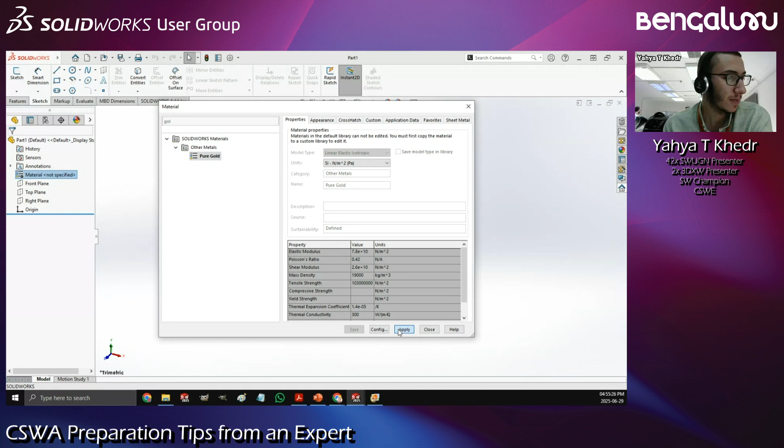So you can go over to materials and specify whatever material the question wants. If it's not in this list, that's fine - you can go to edit material and search for it. Let's say I want gold, for example. Pure gold. I applied it, and that's fine.

So that's cool and everything. I've got the units, I've got the materials. I should be pretty much good to go, except there's one more thing - making sure the exam is actually different from one taker to another. What happens is, let's say I take the exam and Prasad is sitting right next to me, also taking the exact same exam - we're going to get different questions with different numbers and different answers, different everything.

Why? Because there are certain variables that have to be set in the question first, and there's a program or an API in the background changing these different values and variables, and based on that, calculating what the new answers are going to be for me and for Prasad. That's a way to make sure everything is streamlined and easy to create from the exam standpoint, and also to challenge us on another thing - equations.

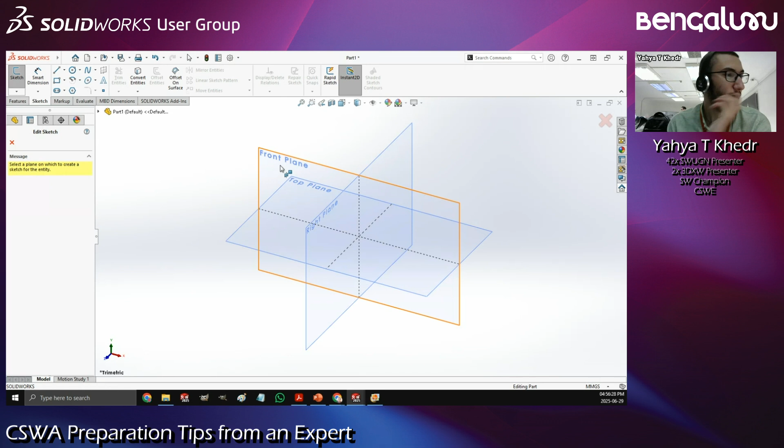Because I can come over here and do a sketch on the front plane - I'm going to be very slow right now because I never go over here to get a rectangle, it's always on my keyboard shortcuts. So anyways, let's say for example I want this to be 100 by 50. Okay, so I'm just going to type in 100 by 50.

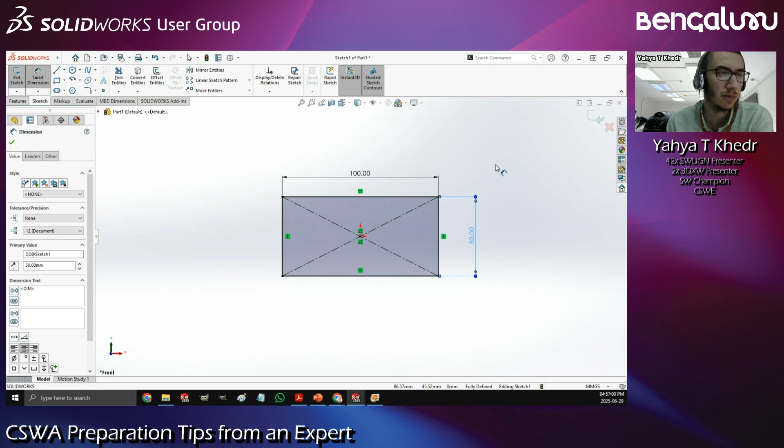That's fine. But if I'm later on going to change it to, let's say, 75 by 25, it might make sense to actually put that as a variable. Maybe, I'm not sure - it's very easy to go back again and change it, right?

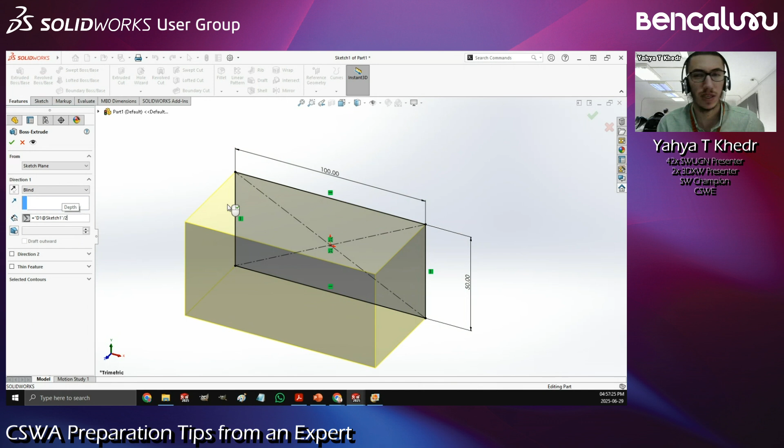So what if I say, okay, let's go and create an extrusion. And this extrusion, I don't want it to be a fixed number - I want it to be linked to this 100 or this 50. I can say equals, doing an equation right now - I want it to be this 100 divided by 2, for example. So it's always going to be this number divided by 2. That's an equation, right? And to make sure you follow me here, if I go over, these are regular dimensions.

If I click on this one, you see this sigma sign - this is the indication of an equation. This tells me that this dimension is actually an equation. And if I change this 100 to 75, this one is also going to update to 37.5, and so on. So right now I'm just using equations, I'm not doing anything with variables yet.

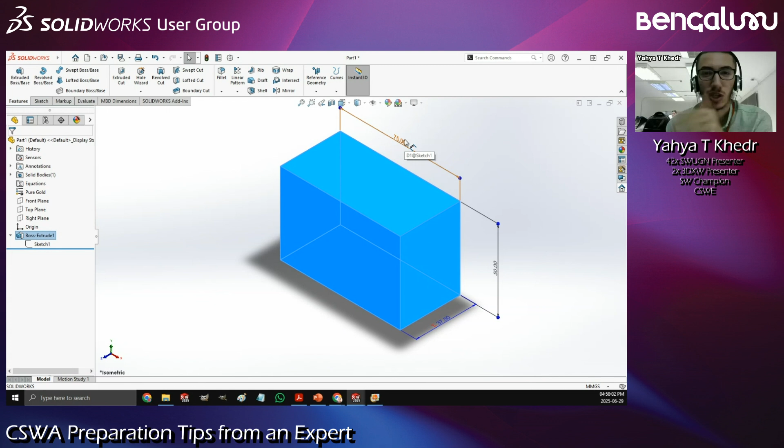But the thing is, what's this 75? How do I reference it later on? If I come over here and say, hey, I want an extrude cut, for example, and I put the circle, and I want the diameter to be the same thing.

What do I type in here? Do I type dimension 1 and sketch number 2, or was it sketch number 1? That's a bit of a hassle, right? That's why the exam actually gives you some equations to use.

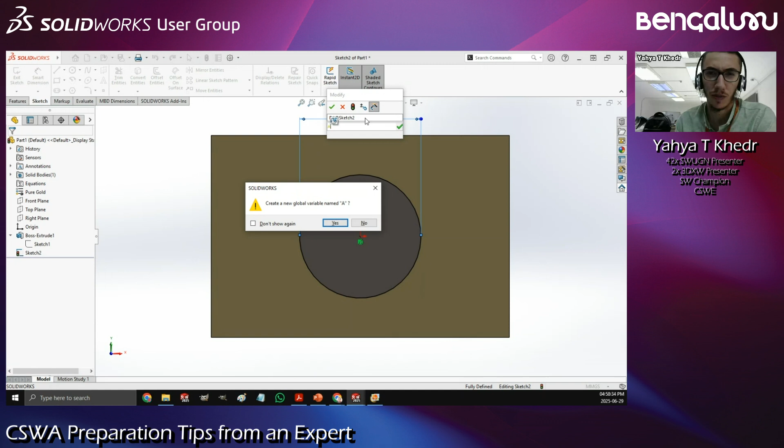Right in here, you can do it right from here. I can say A, and it asks, do you want to create a global variable? I'll say yes. So it's A, and in this case, A is going to be 75. Okay, maybe that's a bit too much, but hey, that's fine.

Anyways, let's go with equals. Once again, look at this drop down menu. I see global variables, and I've got A inside of it. Now I can actually link it to a global variable. In this case, I might do it as A divided by a number, because A right now is 75. Let's keep A at 75.

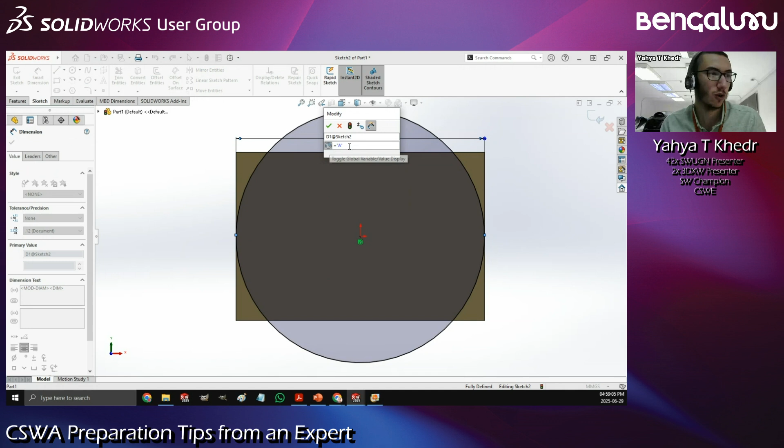Let's go back and get to the equation. I'm just toggling the equation view and the dimension view. Let's go with A divided by 2 as well. Okay, same thing. I'm going to exit the sketch.

So far, it's fine. This is very simple. But remember, what I'm trying to do is maintain design intent. And design intent—it's not my design intent, it's the exam's design intent. So if I go back again over here, this 75 dimension...

You can also come back here and say, I want this to be equal to A. It's also going to be the same value. But the cool thing here is, let me now come to this equations dialog box and right click and manage equations.

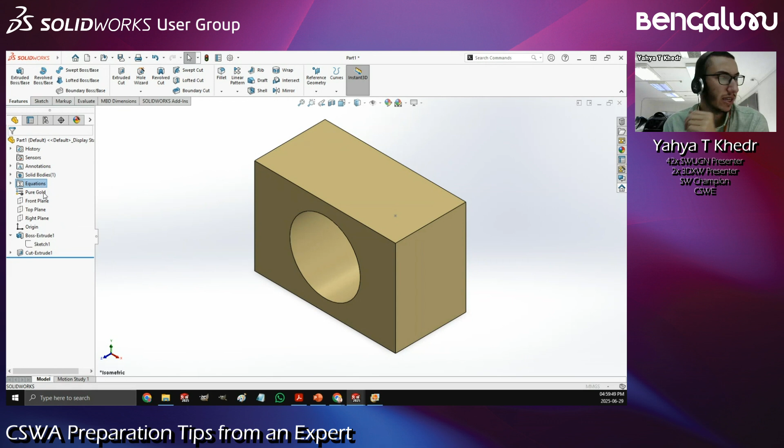I have a view that tells me, okay, you've got this variable, 75. If you want to change it, I only have to change it here, and it's going to populate everywhere else—in this dimension, the sketch for this one and that one. But here, if I want to change it, it's actually referencing dimension 1, sketch 1, which is referencing A.

You see, linking a dimension to a dimension is fine, it will work. But it's not easy to remember which one is the master one that I should change in order for the others to follow. So the easiest thing here to do is to actually change this to also A.

Just like that, all I have to do now is change the global variable and all of these will follow. If I change this A from 75 to 50 and hit rebuild, now look at these values that evaluate.

It didn't change to 50. Let me go once again. Now it's 50—25, 25, 50, right? So it's way easier to have all of these values in the same view over here.

I can also come over here and say I want to create B. B can be like 67.5, because why not? And then C, which can be 2025, and D, which can be 1995, because also, why not? So just like that, I've got a couple of global variables, and since I've already created them beforehand, I can just go ahead and create any sketches or anything.

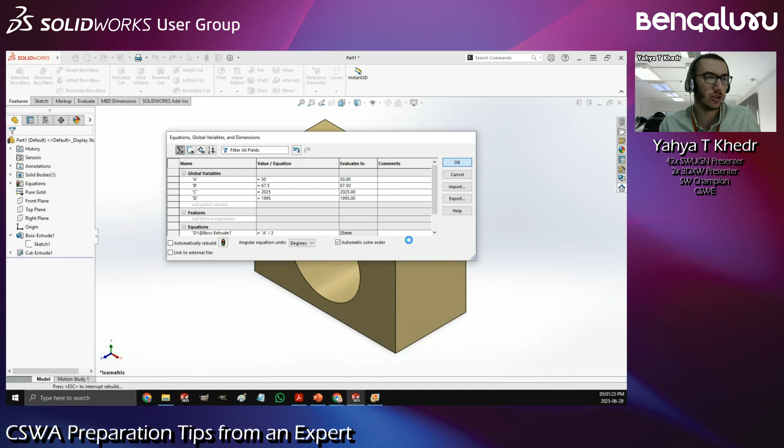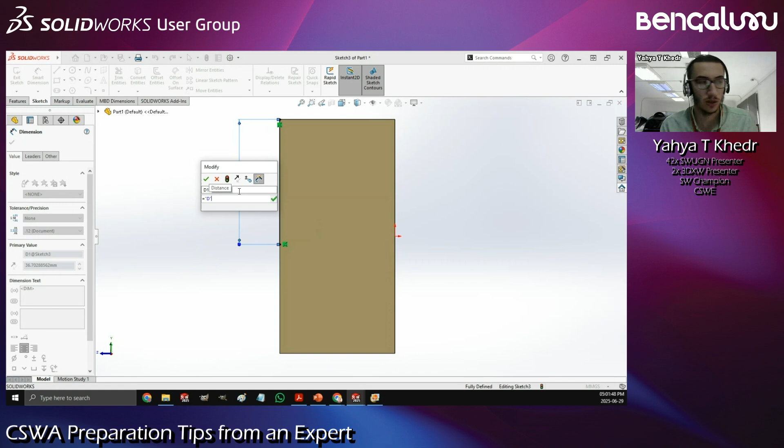Let's do something here, maybe a sketch, and let's say I draw a line like that. If I give that line a dimension, as soon as I hit equals, I have that drop down menu. So I move it, equals global variables, and I've got the whole list to choose from—A, B, C, D, and so on. So I can just choose the number, and there it is.

That's a cool way to link everything together. Once again, to make sure that when you change it later on—when I change A, B, or C—I don't have to remember where I used that 50 dimension. Was it in the extrusion? Was it in this sketch? I don't know, I don't care, because everything is saved by SolidWorks in the equation dialog box. What I have to do is just go and change that value from one place, and it's going to populate everywhere else.

This is the next step that I usually do. I go ahead and make sure that I've got the units set up, the material set up, and then I've also got all the global variables set up so that I can just start using them right away inside of my sketches, or even features.

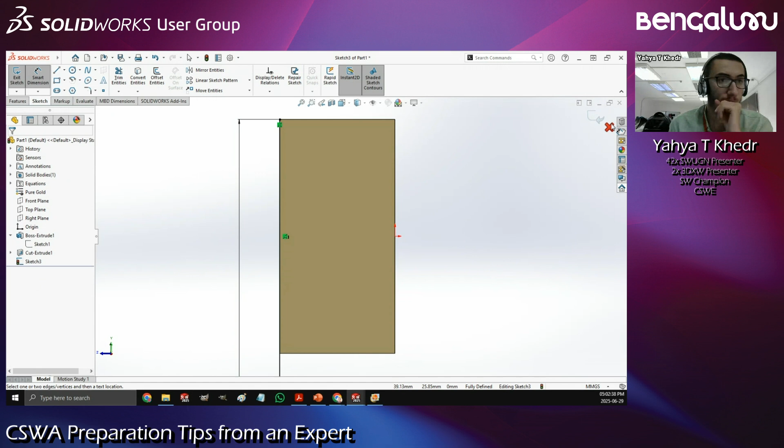Let's exit this one. Now let's talk about the next thing—I've got everything set up correctly. I've got the units, the material, and the global variables. Now what I can do is go ahead and start creating the model, right? That makes sense. But here's one thing: usually we start by sketches. Everything is based on a sketch, and then the sketch is used later on to create a feature.

Not all sketches are alike. This sketch? That's a nice sketch, and this also is a nice sketch. You know what's not a nice sketch? Let me show you what's not a nice sketch.

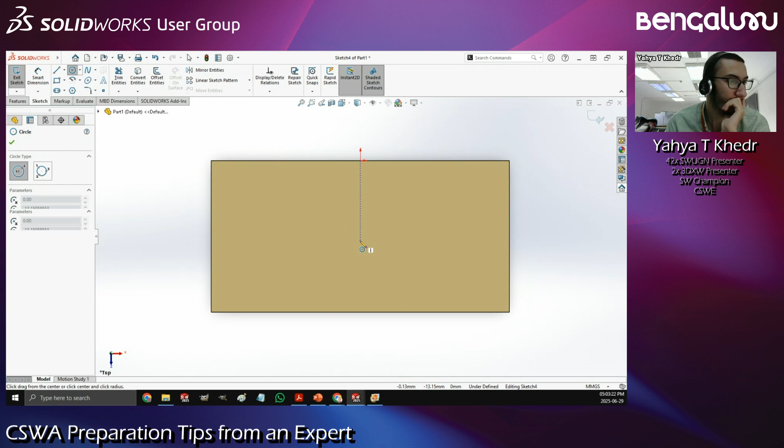I'm going to come over here and do a sketch. Let's say I want a circle to be maybe over here, and I want that circle to be like 15 millimeters. So I'm going to come over here and put a 15 millimeter dimension. Perfect. And I'm going to do an extruded cut.

So just like that, I can do my extruded cut. Let's do it through all, upwards. And cool, right? Everything is cool. Does anyone have anything to say? I created my sketch, and I also created my feature with it, and SolidWorks is not angry with me. The goal is there, but I'm angry with myself.

Why? Because you see, this sketch, when I work with it... someone's saying it in the chat, yeah, it's not fully defined, exactly. So this sketch, when I'm editing it, look at this corner down here in the status bar. It says under defined, and that's not what we want. We want our sketches to be fully defined, and as the tutorial says, fully defined every time.

There's another way to know if your sketch is fully defined or not, which is also from the feature tree over here. See this? That's what the sketch should look like. See this minus sign? That minus sign means that it's underdefined. We don't want underdefined, because even when I edit a sketch, if I look over here, it also says underdefined. That's not good, because what underdefined means is that I can just come over here and drag this around, move over here, there. There's nothing that controls it, nothing that says hey, you should be fixed in your place.

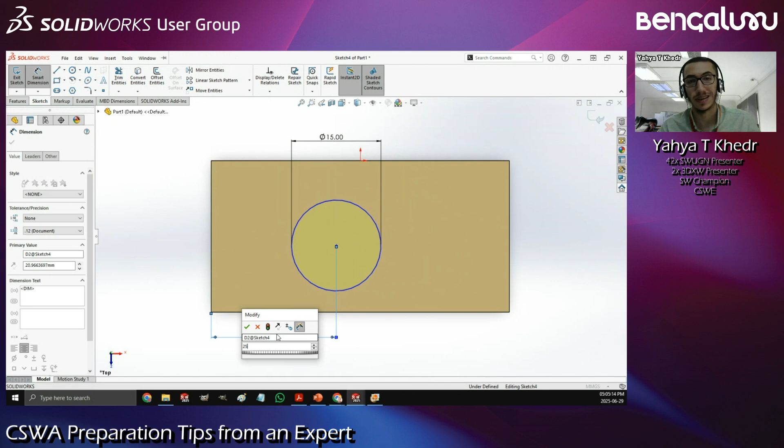Unlike if I say, for example, let me grab the dimensions, put a dimension from here to, let's say, over here. Let's say I want this to be 25, maybe even link it to a global variable or something. And then maybe from top, you don't have to do it to this edge, not to the circle. You hit shift, that's a nice thing. You hit shift and select this one, just like that. Let's say 5. And just like that, I've now got a fully defined sketch.

Now it says fully defined, and there's another way to know it. Do you know why? So I mentioned the icon over here, the sketch. It doesn't actually say anything between brackets, just sketch name, and it says also down here in the status bar. There's one third thing, it's more of a visual thing. Do you know what the visual thing is to indicate if this is a fully defined sketch or not?

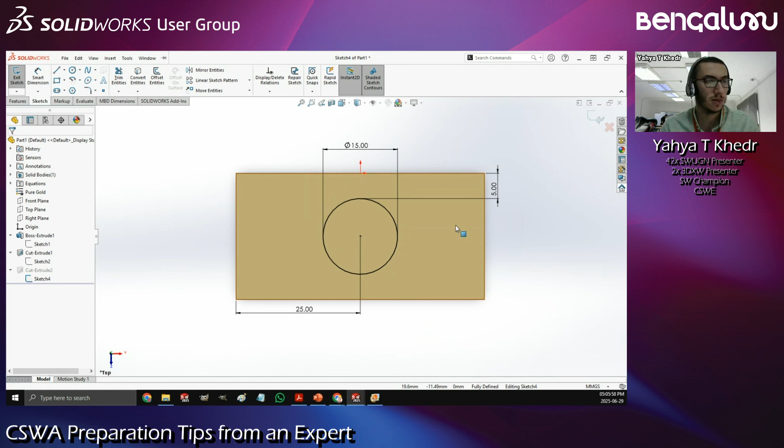Let me make it a bit easier for you. I'm just going to delete one of these dimensions, and you're going to figure it out. Okay, close dimension, what changed? Yeah, just as Christopher says - Christopher, you're correct. It turns blue. So right now it's blue, which means it's underdefined. If I bring that back once again, it's now fully defined again.

That's another thing - you have to make sure that everything is fully defined, because that means all the details that the exam gave you, you're now correctly conveying them inside of SolidWorks. And on the other hand, let me just delete all of these, because you don't have to use dimensions for fully defining your sketches. I can do something like this.

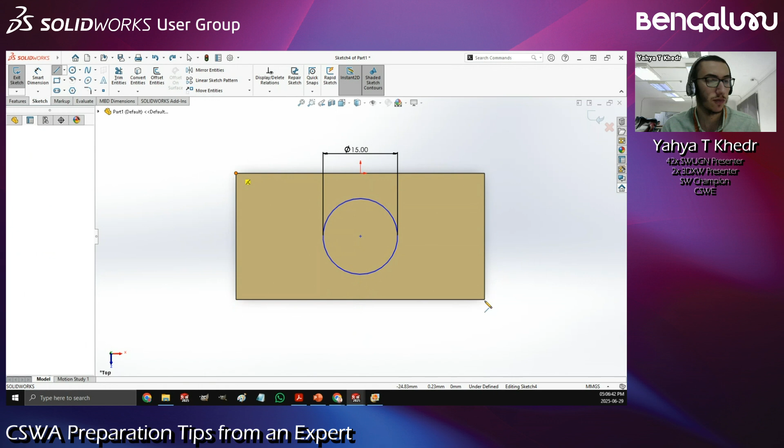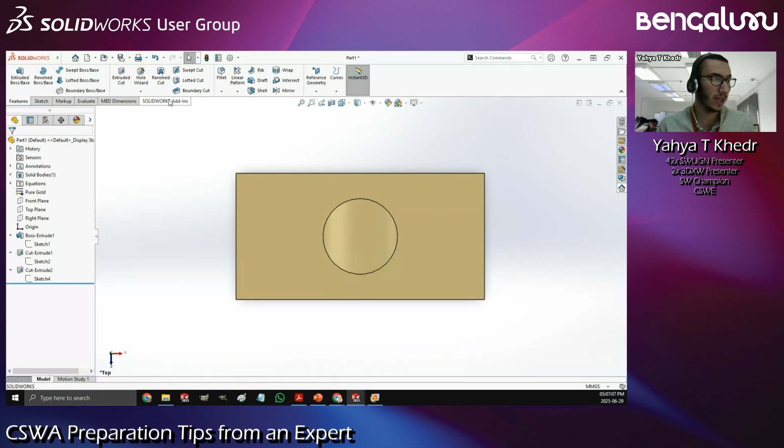I can come over here, choose a center line, and just put the center line from this point to that point, and say, you know what, I want this circle - right now this circle can still move around, right? I can just put a relation between this and that, maybe midpoint, and now it's also fully defined, right? So there are multiple ways to fully define - maybe using dimensions, maybe using relations, maybe using both, mix and match. But the main thing is, once you fully define your sketch, you can't hold something and drag it around by mistake or anything.

Everything is perfectly in place, okay? And it's not perfectly in place by using the fixed relation. So I don't come over here and say, hey, let's maybe display delete relations. Select all, and then go delete all. Everything's now this, and then Control A, select everything, fix.

Well, it's fully defined, right? Yeah, it says here fully defined. It's black, no minus sign over here. That's fine, right? Well, no, because I can't edit it. I can't say, hey, this should be a bit longer, a bit taller. What's longer and what's taller? Because there is no dimension to change it with.

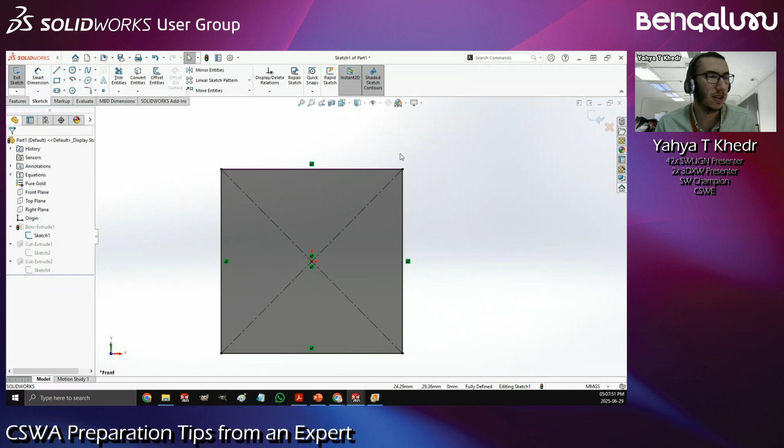But when I have fully definition with the correct relations and dimensions, I can easily come over here and say, you know what, this 50 actually needs to be 60, and so on. And it's still fully defined, but I'm still able to change things about it. Okay, so this is really important.

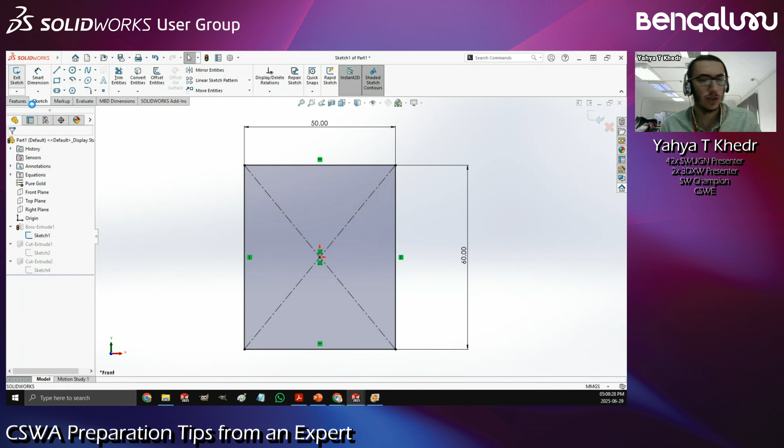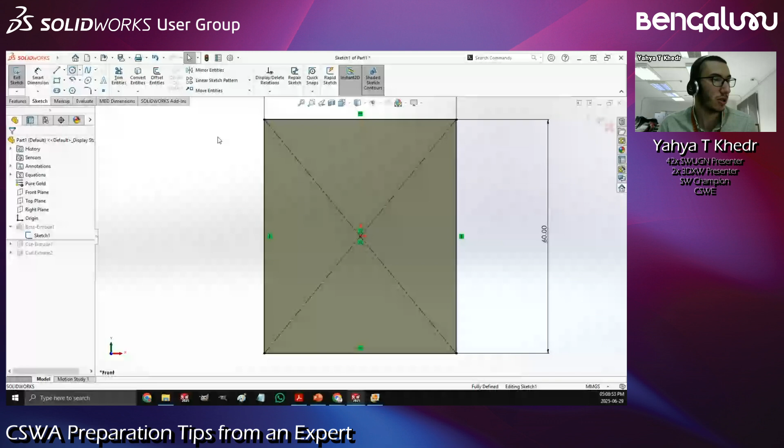Maintaining fully definition at the same time, all the dimensions and relations and design intent that the exam tells you to use, still used in the exam. Okay, so this is the next part. We make sure that all of our sketches are fully defined. Now all we have to do is start by creating our features. And we've already created a bunch of features over here. Maybe if I'm in an exam situation, I might create this a bit different, because this extrusion, it's from the front plane, and this cut is also from the front plane. So what makes me do it like that instead of just coming over here, maybe changing the sketch and putting the circle right in the middle? I can still put a dimension, and it's also going to be the same thing, linked to my global variable divided by 2, just as I want it to be. And then I can exit the sketch, and I'm pretty much going to get the exact same result, right? It was just in one feature instead of in 2 features.

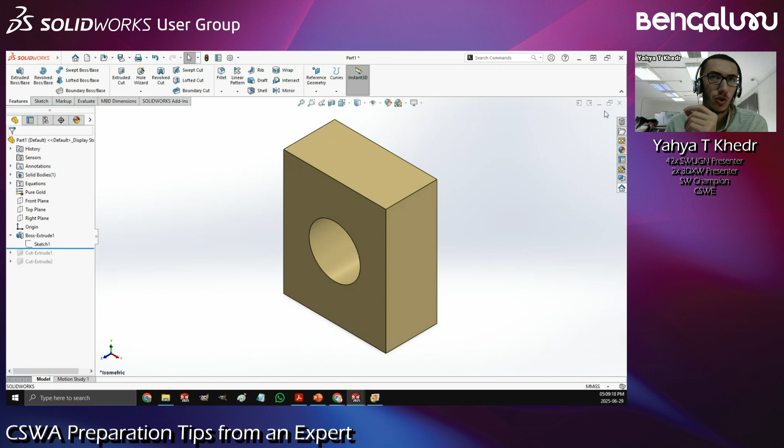And this is another thing. The choice of your features is really important. Let me open another one. You see these 4 cylinders? Let me know in the chat what you think are the features that I used to create these 4 cylinders. What do you think, Prasad? How would you create these cylinders?

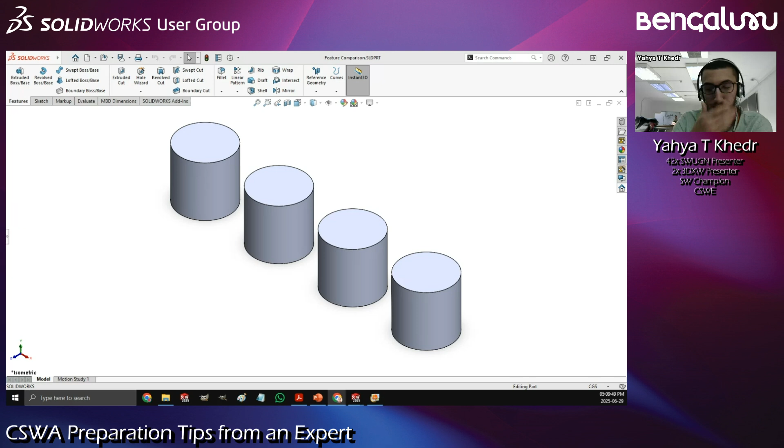Extrude. Okay, so you draw a circle and then extrude, with the right? I would just create the circle and extrude them. I mean, I would rather extrude all of them together. John actually agrees with you. John also says extrude. Christopher says extrude. Everyone's saying extrude, okay, cool. So you're not wrong, but you're also not right.

Okay, so you see this first one, it is an extrusion. I had this sketch and then I extruded it by 10. So it's an extrude, right? But you see this one, well, this is actually a bit different. This is a revolve. I had this rectangle and then I revolved it around the axis. Don't ask me why, I'm just explaining something here. Both circles, they created both cylinders, as I should say. They gave me the exact same end result, but they were created with totally different ways.

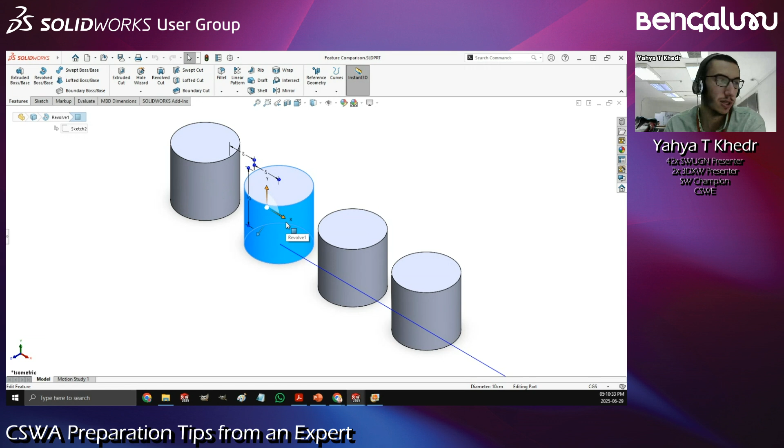What do you think this one? How do you think this one was created? Another extrude? Well, actually no. I've got a line, I've got a circle, and I created it with a sweep. Not the best choice, I agree, but still I got the same end result with a circle and a line and a sweep between them.

Okay, I think you guys now know where this is heading. The 4th one, what do you think this is going to be? Loft. Yeah, exactly, so this is a loft between 2 circles. Okay, so definitely not the best choice, but I'm just explaining that I've got 4 different features that gave me the exact same geometry in 4 different cases. So what I'm telling you here is this.

You've created the sketch, you've built intelligence in the sketch using the equations, using the variables, and so on. Make sure to follow the same intelligence and create the right features for the right model, because you can create different geometries using different types of features. In this case, all of these cylinders are the exact same dimensions, the exact same volume, the exact same mass, everything, but I created them in totally different ways. One of them is really quick, one of them is a bit slower but maybe easier to change, maybe, and one of them has the exact same dimensions as the ones in the drawing.

The drawing said it's a radius, not a diameter. So here I used the radius, not a diameter. Maybe. And one of them is just absurd. I created 2 circles and a plane, and it doesn't make any sense.

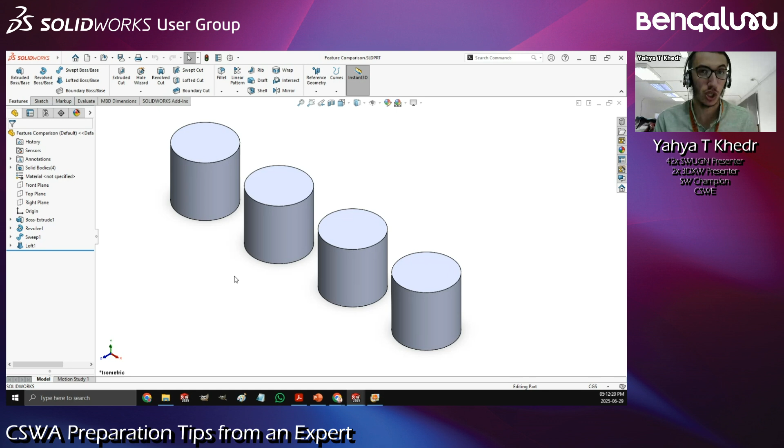But that's the thing. You have to know which is the best feature to go with, regardless of what intelligence you created, because the intelligence that you put in the sketch is not going to follow unless you actually chose the correct feature. And once again, there's no right or wrong, just the best option, and slightly less better, slightly worse, and so on.

So once again, as I said, when you look at all of these, this one, only one sketch. I put the diameter, I gave the height, and that's it. For the revolve, I actually had to draw a rectangle. This 5 is not the one on the dimension, for example. Maybe the dimension says this is the diameter, but I put 5. I had to do my math in my head. 10 divided by 2 because it's a radius, so that's 5.

So I did it like that. But it's still fine, one sketch, not a biggie. But remember, which is easier to define? A rectangle with 2 dimensions or just a circle with a diameter, right? 1 dimension.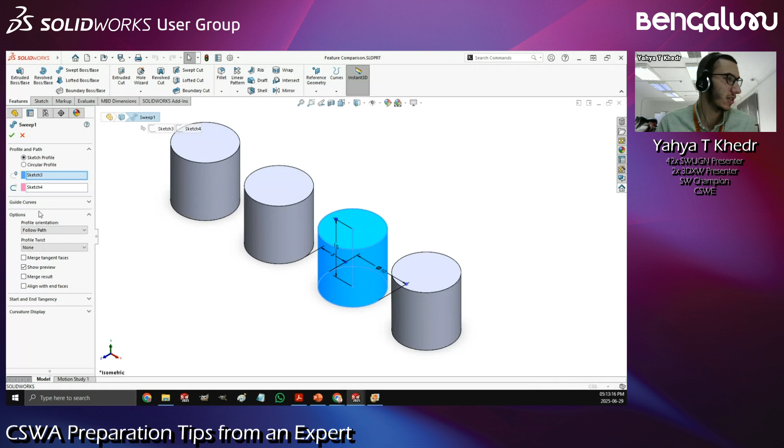And then it comes to the sweep, where you have to draw a line, a circle, create it like that. I mean, technically you don't have to use the circle, because in 2016 and higher, you can just come over here, use the circular profile, just enter the profile over here. So in this case, it might actually be a good one. I just draw a line, 10 centimeters, go to sweep, and just like that, I already have the shape that I want.

As you can see, just like that. And I didn't even use this sketch. I can now delete the sketch just fine, you know. But that's the thing. You are the one who's going to decide which you're going to go with.

And then at the very last, we've got the loft, we've got the bottom sketch and the top sketch, and just never do use this one. But what I'm trying to say here is this. I'm not trying to say use a sweep or use a revolve or use a boss extrusion. What I'm trying to say is use the best in that situation.

Who's going to know? You're the one who's taking the exam. You're the one who's going to say, okay, in this situation, it's better if I maybe create one circle and then do a linear sketch pattern and then extrude all of them. Or maybe because I know that sketch patterns are a bit higher in performance cost, and they're worse in performance.

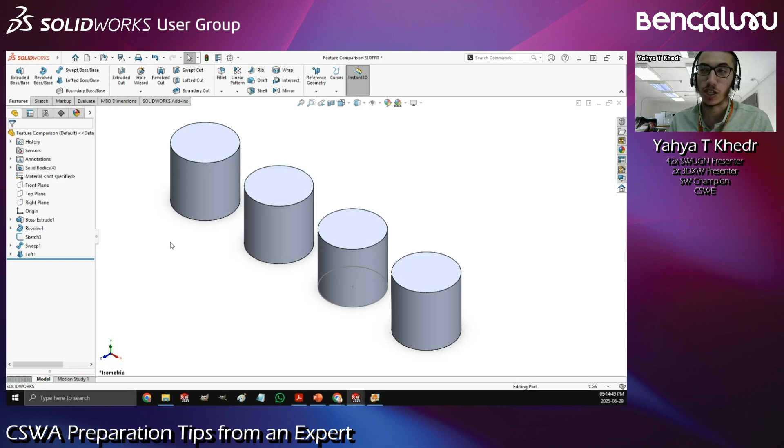They slow my system down. So in that case, I actually might do just one circle, one extrusion, and then do a linear pattern of that extrusion, because from my experience, I know this. So that's what you have to do in your mind. You have to decide which route is better. Once again, all of them are going to give you 4 cylinders, but which is the easiest, which is the fastest, which is the easiest to model, which is the easiest to edit, and so on. You have to take all of that into consideration.

Okay. So that was it when it comes to this part. And the very end of the part modeling section of the exam is you creating the part, you then making sure that everything is correct by supplying the software with the results. Okay. And we're going to talk about how that is done in a moment.

But first, we've got to talk about something else, which is the modification. I think we've already hinted on it earlier. Is that let's open like a feature like this one, for example. This part. Okay. How easy do you think is it for me to edit this component, given that it's not me who designed it, someone else designed it?

I've got some names over here: base extrude, cut extrude, cut extrude, cut extrude, boss extrude, and so on. It doesn't really convey any information, but at least if I go one step at a time, I can understand how it was created and follow along, right? So this is really important. Since you're the one who's going to be creating this part, maybe you're going to create it in a different way. But remember the very first tip I started with, to go ahead and check the whole exam and see what the different questions are asking you to do now and later on.

That's really important here, because when you're asked to make this a bit longer, change this radius to another value, or change the position of these two holes, how easy is it going to be for you to do that change? Is it just one dimension to change, two dimensions, or do you have to remove features, suppress features, add features, and so on?

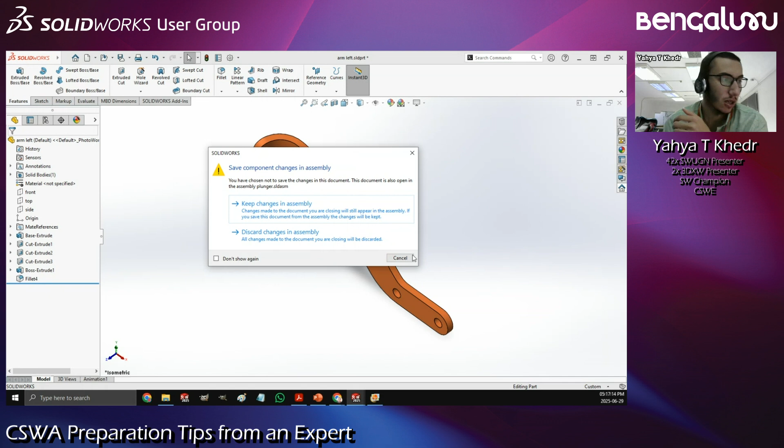Okay, so that's cool and everything. We've got our part designed, our modifications created, and now comes the time for changes in the assembly. In this part we've got a couple of different things: some components given, probably as a zip file you have to extract first, and then you're asked to create them in an assembly file and assemble all the components together. It usually tells you which parts go where and so on. So this is an example.

This is a part that can still move, everything is assembled, as you can see. Assemblies are one of the areas that you actually don't have to fully define right away. Later on, maybe at the end of the assembling process, when it tells you this should be here, this should be there, maybe by then it's fully defined. But when you're still creating it, it's fine to have it underdefined. But the main thing here is this.

Where is this assembly in 3D space? That's a really good question, because when I'm talking about parts, I'm usually more concerned about whether the geometry is correct, whether the mass of the part is correct, whether the volume of the part is correct. When I'm talking about assembly, it's actually quite different.

I'm actually more concerned about all the components together. Are they assembled together in the correct form or not, in relation to the environment around it, according to where it is in the 3D environment. So it's really important, from the very beginning, to think of the origin, the main reference that everything is going to be set up according to.

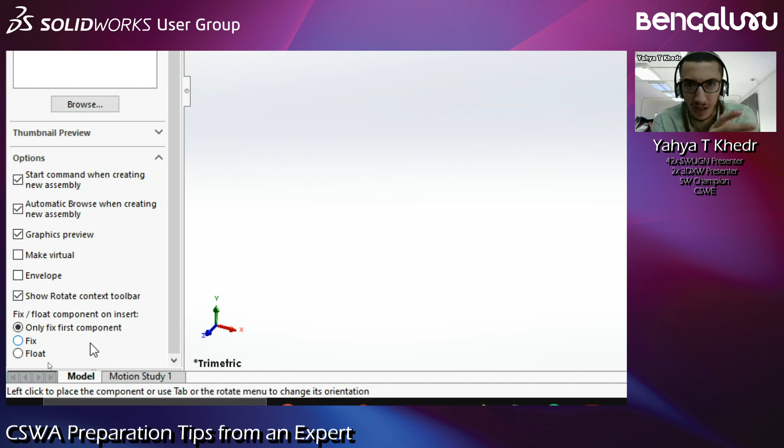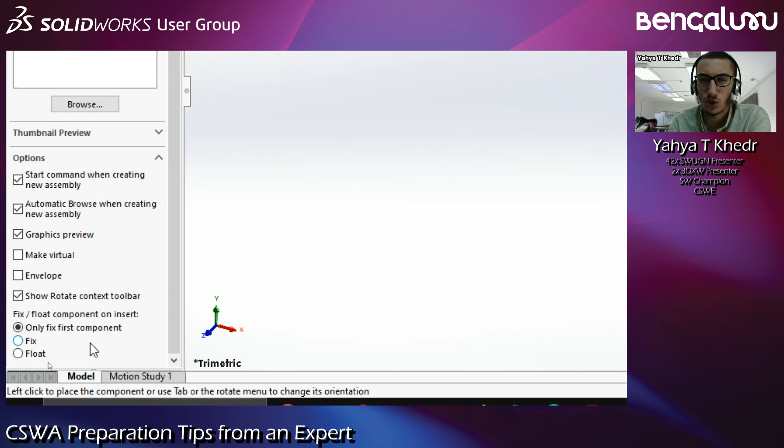This is really important, because many people will just fix it, and wherever that first component goes, that's where you are - you just assemble everything around it, regardless of where it is, how it's oriented, and so on. That might be fine when you're just doing a quick demo of something, but not when you're in an exam where everything is supposed to be precisely according to the question you're given.

Because in this case, what you actually end up having is a first component that should be oriented or put in a certain area or position. Then the other components have to be assembled according to that first position, which you hopefully have created correctly in the first place. If you haven't, then everything is assembled correctly relative to each other, but not to the correct reference - the origin is in the wrong place, the wrong orientation, and so on. So this is really important.

When, let's say for example, I grab this component and I want to insert it...

Remember, for the very first component, maybe I put it over here. That's fine. As you can see, this F mark between two brackets means it's fixed. I can't hold it and move it around. But that's a very easy fix.

I can just right click and say float. Now it's float. As you can see, now I have the minus mark between the two brackets. It's also underdefined, as you can see over here. Now I can just hold it and move it around if I want to.

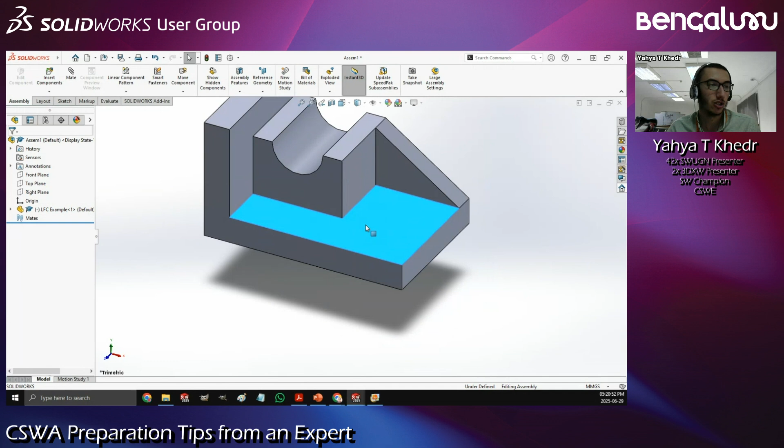Let's say, for example, here's the origin. Maybe I want the origin to be at this point, or at that point, or at this point. Whatever the exam tells me to put it, I'm going to put it. This is really important because it was in another arbitrary position, but that's not actually what we want. Maybe it's actually exactly where this origin is.

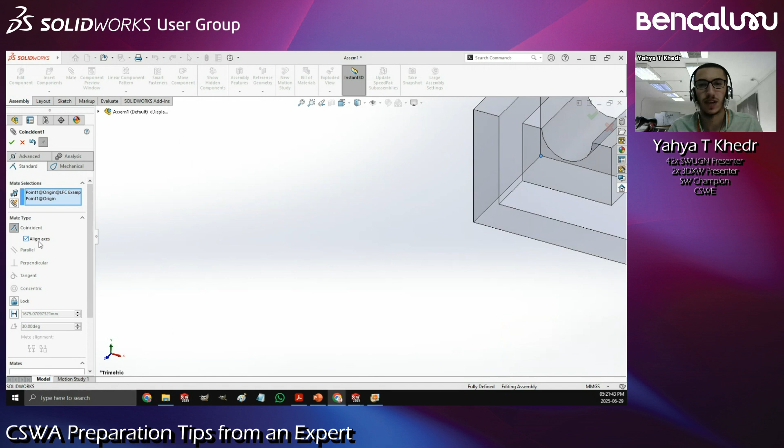In that case, there's a very cool thing: if you have a coincident between two origins. Let me not do it from here, which you can. I'm just going to do it from the mate command manager because I want you guys to see this. When I put it like this, you see this option, align axes. You don't have that option when you just select any two points, or a point in a line, or line in a line, or face in face. You only get it with origins together.

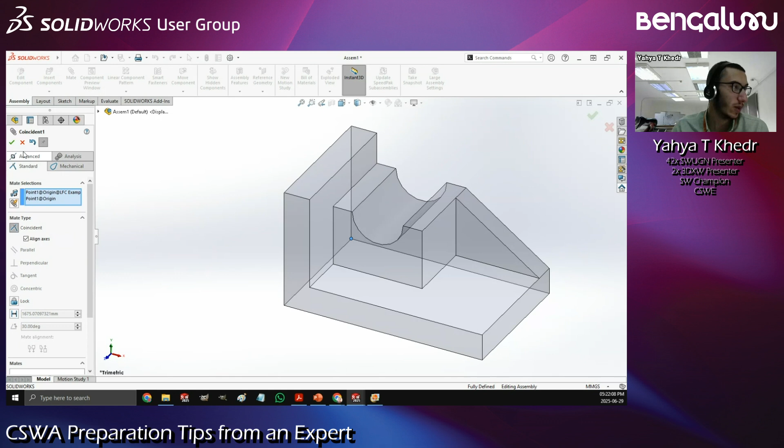So align axes means in general that you're going to have the front plane of the part aligned coincident to the front plane of the assembly. You have the top plane of the part aligned with the top plane of the assembly, and the right plane of the part with the right plane of the assembly. So all three main planes are going to be coincident with the three main planes of the assembly as well. And in that case, when I hit OK, let me just put this one.

Now it's also fully defined, not fixed. And I can't actually move this around. And by the way, if I go over here to the mates, and if I disable this, this is how it's going to look like. Let me disable this align axes option.

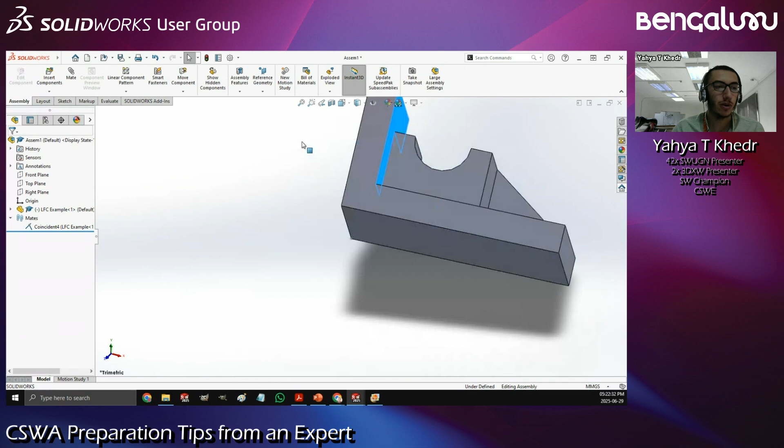I'm just going to disable it, hit OK. Now it's back again underdefined. It can't move, but it can rotate. So this point is fixed, but it can still rotate around it. This is really important if you want to save yourself a couple of clicks. If you don't want to do three mates, you can just do one mate, just a coincident mate, and have everything set up to that.

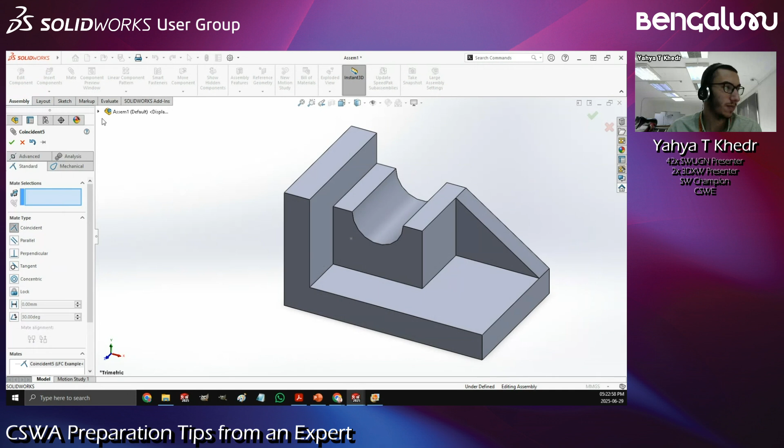But once again, remember this is only between origins. So to have this, you would make sure that you actually mate the origin of the assembly with the origin of the part. Let's say I come over here and I want the origin of the assembly with this point instead - I don't have the align axes option. In that case, it's just a regular coincident between a point and a point, and it can still rotate, as you can see. This is really, really important.

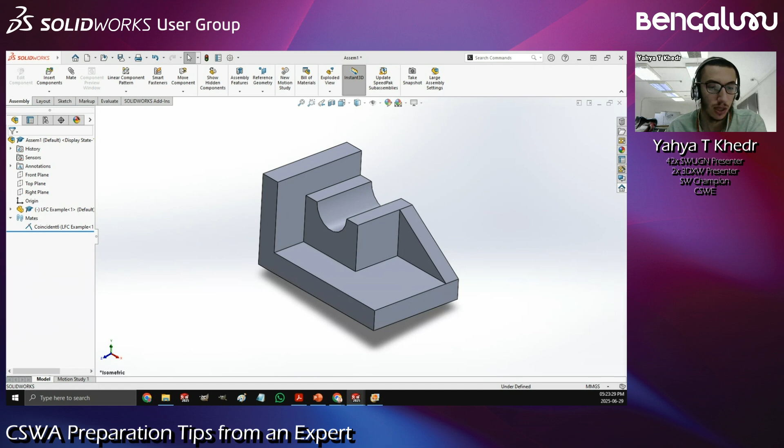So now all I have to do is just go ahead and start adding different components, mating them together, and so on. Hopefully you've got everything set up correctly. Let me get back again to the assembly that we had over here. We talked about the origin - that's the first thing. We've got a question over here.

Is it better to make every part with center as origin? No. The better option is to see what the exam is asking you to do, because the exam is going to tell you, I want the origin to be here, I want it to be there, and so on. So the best option is to follow that. Many have been guilty of this - not me, but the thing is, if you put the assembly in a different location, even though the assembly itself is correct, you're going to end up with incorrect answers, even though you've assembled everything correctly, because you have the wrong reference. Make sure to follow the origin that the exam tells you.

The exam might tell you that the origin is arbitrary. In that case, you can put it wherever you want, that's fine. In that case, I always do this - so this is not an assembly I created, but what I would do is just go over here, float, and then just mate the origin of the first one with the origin of the assembly together, just like that. I always prefer to use mates and relations and dimensions, and never use the fixed relation or the fixed dimension or the locked dimension and stuff like that.

It's obviously a personal preference, but it makes it easier for me later on to come and suppress a mate or unsuppress a mate and deal with it in that case.

Can we do this between a face and an origin? No, it's only between an origin and origin, not even a point and an origin, not any two points. It has to be two origins. Because origins are what have planes referenced by them, the front, top, and right planes. So when you say you want these two origins aligned together, it really says this is the x, y, and z direction from this axis, and this is the same for the other axis. Align them together, that's what it does.

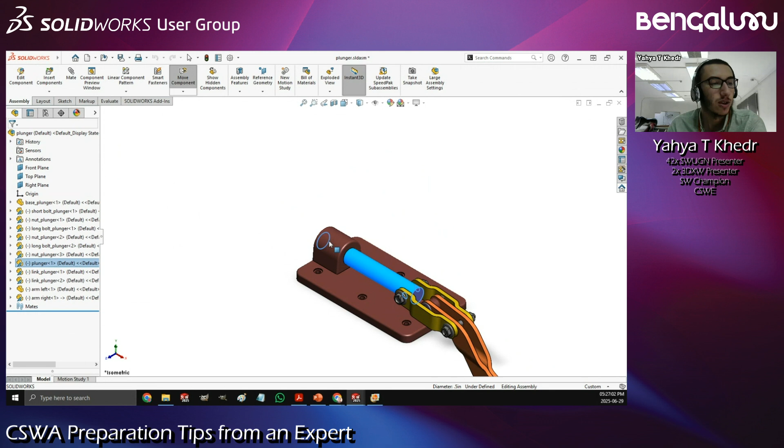Now we've got the origin where it is, we've got the mates, we've got all the components. The last thing to deal with is to make sure everything is working correctly. So what I can do is start dragging components around and see, is this movement right or not? Is this actually what I expect from it or not? Based on that, I can say if I've got everything right or not.

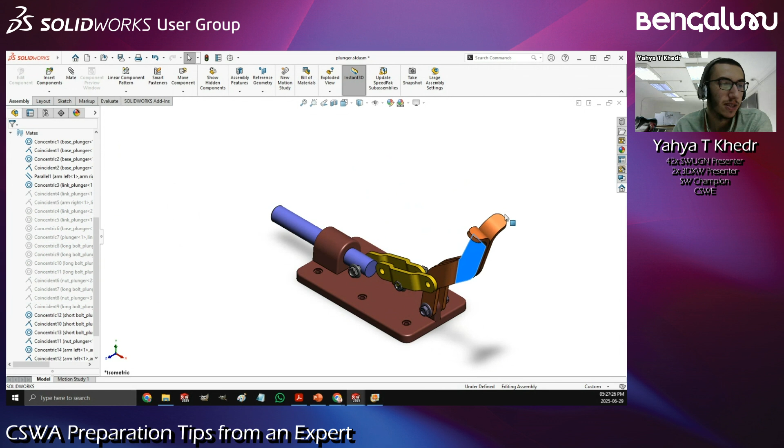It's not going to tell you, hey, hold this component and drag it around, but it's good to do that just to make sure you've got everything correctly. Because let's say you have some missing mates in here, let's come over here and suppress some random mates. It's obvious once I do this that something is wrong, and in that case, okay, I forgot to add this mate or that mate and so on. So it's easier to see if everything is working correctly when something is in motion.

It's usually going to be the biggest type of movement, one that can affect multiple components at the same time, as I'm doing right now. So when I'm moving this arm, it's actually moving the other arm, these bolts, these washers, these screws, this rod, and so on, everything is moving as well. So it's really easy to showcase visually if everything is correct or not. If there's something incorrect, make sure to fix that before you actually answer the question.

That's actually a good way to jump into the next part. We talked about part creation, part modification, assemblies. The next thing is answering the question. What kind of question am I going to expect? It's going to differ depending on what kind of question you have.

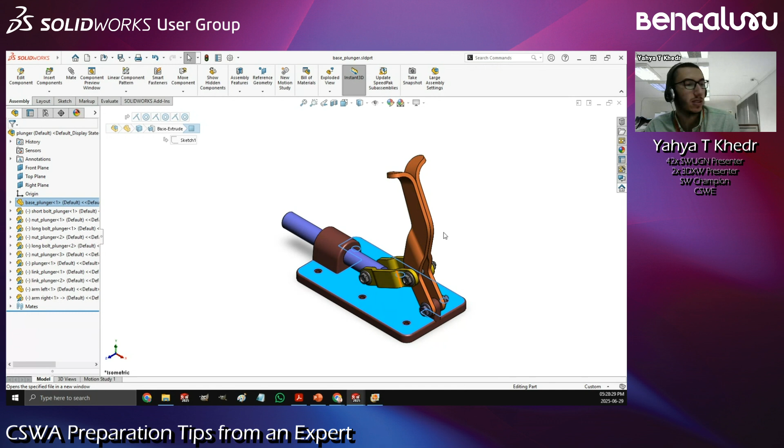For example, let's go back again inside of a part. Right now inside of a part, fine, what it really needs me to do is make sure I've got the correct units, the correct material. Put any material, let's say aluminum, why not.

Now when you come to the point where you actually have to answer any question, you're usually going to be looking in one of two places. The first is the evaluate tab. If you don't have it, just right click, tabs, evaluate. And specifically inside of the evaluate tab, you only need two commands.

You need the measure and the mass properties. Measure is, as it says, just a general handy tool to measure pretty much anything.

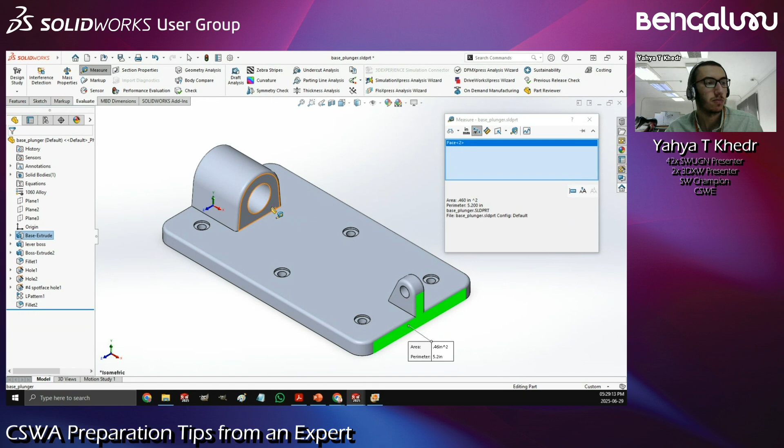It can measure diameters, it can measure distances between different faces, it can measure angles, maybe between angled faces, it can measure distances between circles or cylinders or holes and so on.

It's really versatile, but you don't actually need to launch the measure command every single time. In case you haven't known, if I click here, control select and click here, I want to know the distance between these two - I don't actually have to open the measure command. All I have to do is come down here to the status bar. It says the normal distance is 3.5 inches. Just like that, I know the distance.

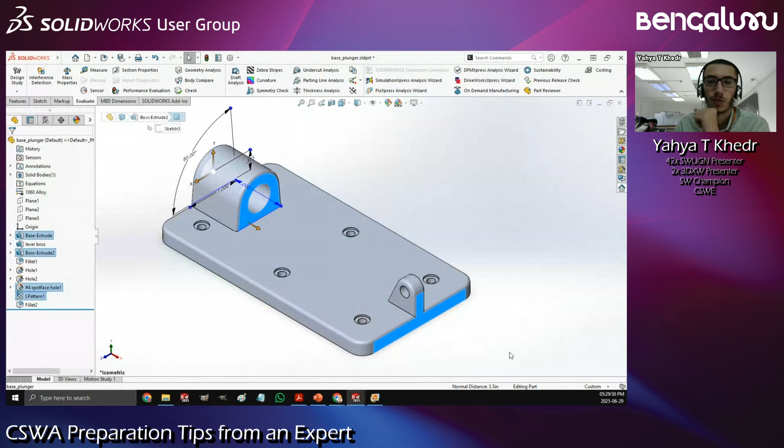If I just click on this circle, it tells me over here the diameter is 0.5 inches. The same thing if I go, let's say for example, from here to here - it also tells me, okay, distance between cylinder axes is 2.305 inches.

So most of the time, I don't actually have to open the measure command. Most of the time, I actually have all of the measurements that I need already presented to me over here.

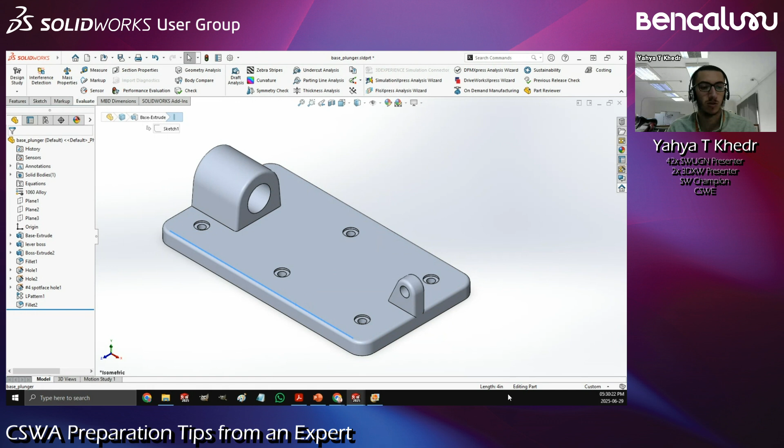And this is the same for lengths. I can just click on this edge - it tells me, okay, this is 4 inches long. I can select this top and bottom face - it tells me, okay, the thickness or the normal distance is 0.25 inches, and so on.

So this is a really cool tip to save some time for yourself, and you don't actually have to go to the measure tool every now and then. You can do everything just from the interface itself.

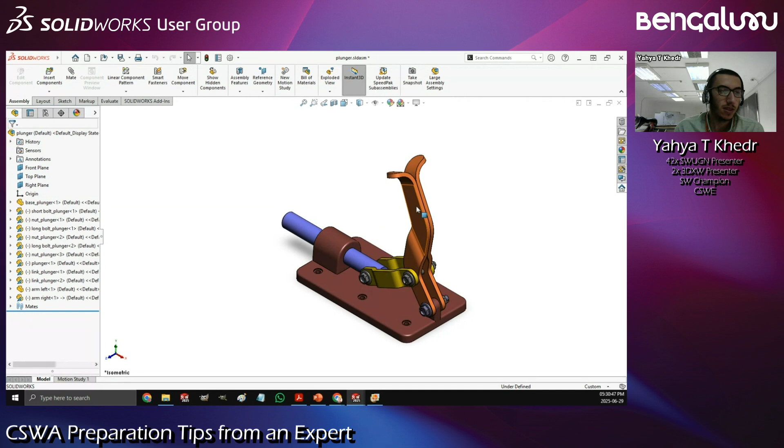Okay, and not just lengths or distances - let me get this one, for example. So this component, I think we've got some arbitrary angles that we can also use. Yeah, so if I select this face and this, now it tells me the angle between them is 75.8 degrees. So not just distances, not just lengths and so on, not just diameters or radii, but I can also get angles.

Speaking of radius, I can just click on this radius over here - it tells me, okay, this radius is 0.21 inches, and so on. So it's really versatile. Give it a shot.

And get yourself used to using it just from the status bar instead of actually going to the measure command, which is actually fine, but that's another thing to consider. So it can ask you about that.

It can ask you about lengths of different things. Where is this component relative to this component? What's the angle between this face and that face, and so on. Or it can ask you about the mass.

But yeah, the main thing is remember to have the material selected correctly, because the material is going to affect the density, and the density with the volume is going to affect the mass.

Okay, so what you have to do then is just get the mass and put it in the question. And this is a very important thing, because usually you've got multiple questions, right? We said that we have a question to design something, and then you actually modify it later on. Let's go back again to what that actually looked like.

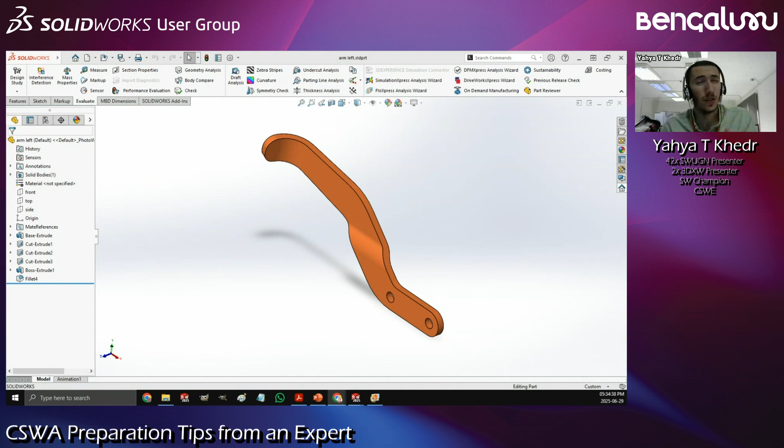Make sure you actually enter the correct answer, because most of us have been there before, where you actually design it correctly, you go to the mass properties, you see 0.012, and then when you go to the Tangix tester software to enter the value, for some reason you fat finger or hit the wrong button and enter 0.013 or whatever. You enter the wrong value, and it's a bad feeling knowing you designed it correctly but messed it up instead of entering the value.

So if you want, you can right click, copy, and then in the exam, Control C and V won't work, but right click copy and paste would work. So you can copy and paste to make sure you've got everything correct and don't enter the wrong value. Yeah, that's one more thing to keep in mind.

So yeah, we pretty much covered the basics of the exam. We talked about part modeling, what the sequence of our thought should be, and then when we come back to modify it, if the part modeling process was done correctly, that's going to help us a lot in the modification process. And when it comes to the assemblies, whether it's where the assembly is going to be, how the movement between the components is going to be, and so on, you have to make sure you've got that correct as well.

And at the very end, when it's asking you to extract information from the software, make sure you've actually designed everything correctly. Either dimensions, distances, angles and so on through the measure or from the status bar, or when it comes to the mass properties, you've got the mass, which heavily relies on you choosing the correct material. But that's not all, because remember when I mentioned the origin, the assembly?

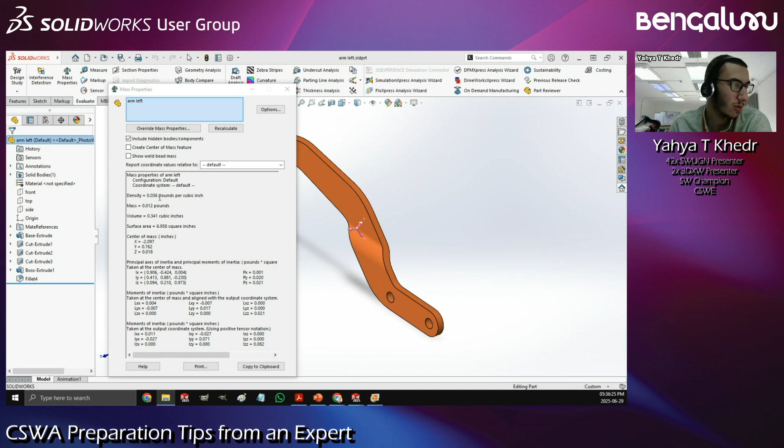Let me just close this component, come back to the assembly. Let's put it at maybe this location, and let's go to evaluate, mass properties. Okay, let's rebuild it. Now it tells me the mass is 0.184. See, that's one of the issues you might have - you might say out loud the wrong value, and when you come back to enter it in the exam, you just say 0.16. So yeah, anyways, it's 0.184.

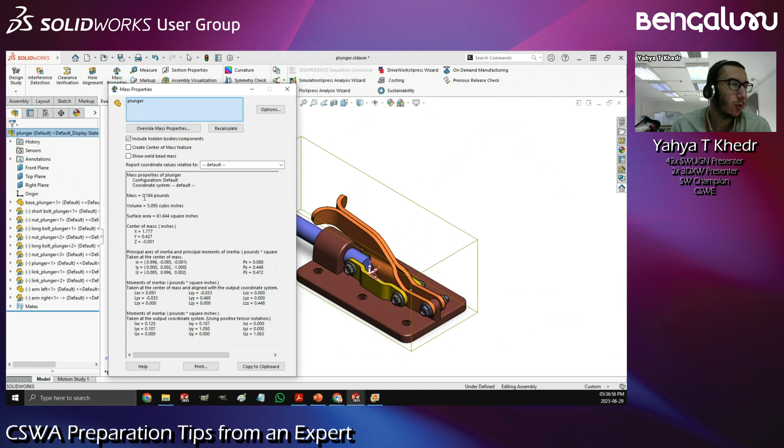What happens when I change this over here? What do you think is going to happen when I check the mass once again? Is it going to differ? Is it going to change, increase, decrease? What's going to happen?

Let me see. Okay, no, I don't see any answers coming in. Nothing. Okay, yeah, exactly, you're correct. Nothing's going to happen because I didn't change any design elements, all I did is just move it around, right? Yeah, just as Jan and Christopher and John said, mass would stay the same.

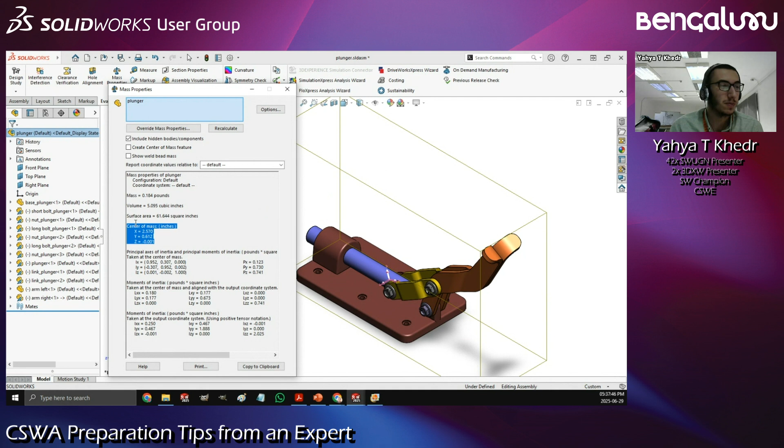But you know what didn't stay the same? So the mass is the same, the volume is the same, even the surface area is going to be the same, but the center of mass, that's not going to be the same. In this case it says 2.5, 0.6, negative 0.001. Now try to remember these values. I'm going to drag this all the way over here. Mass properties, 2.3, 1.7, 0.143. Totally different values, right? This is where what I was talking about when it comes to the origin really comes in handy, because right now it's referencing this origin, the assembly origin, okay?

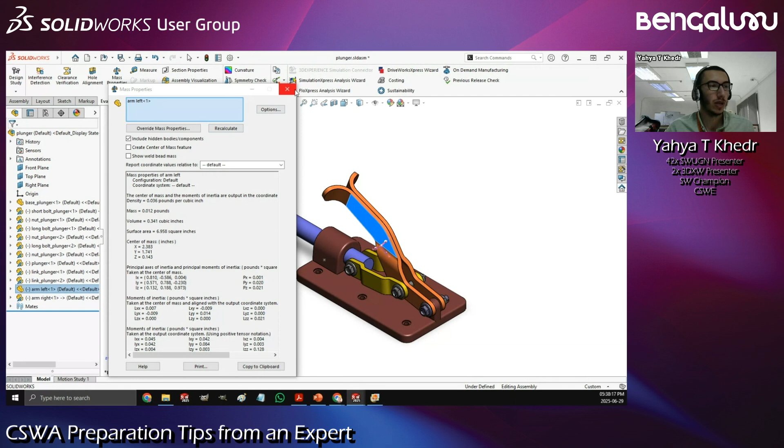If this origin is in a different area - so I'm not going to actually change where these are - what I'm going to do is just come over here to that, where is that coincident mate that I created?

I'm going to suppress this and make sure everything moves as it is. Let me just move it. Oh, okay, it's not actually going to move as it is. Let me just fix it in place.

Where is the rotation mates that it has? Let's lock rotation for that, and let's also lock rotation for the other concentric mates, just to make sure that nothing rotates or changes its position at all. So I'm just right clicking, locking the rotation, making sure that these concentric mates stay fixed in their place.

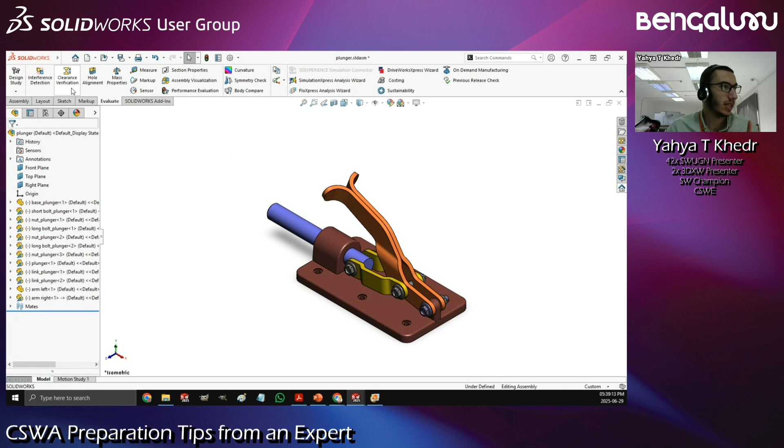So right now, once again, what is the mass? It's this value. You know what, I'm just going to put it in the chat real quick. Remember, you can also right click and copy. So this is the mass before. Now let me just move this around.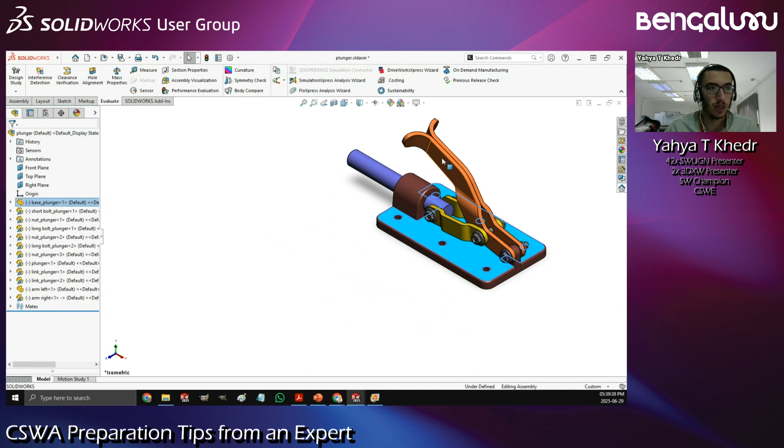As you can see, these are not moving together, right? The angle didn't increase, this didn't go in and out, nothing changed. All I'm doing is changing where it is—instead of being on the left, put it on the right, and that's pretty much it. Now when I go to the mass properties, rebuild—now it's totally different. Let me put that in the chat as well, and you guys can compare. X has increased by about 1.5, Y has increased by 1.5, and Z has increased by about 3. So that's what it means by the reference.

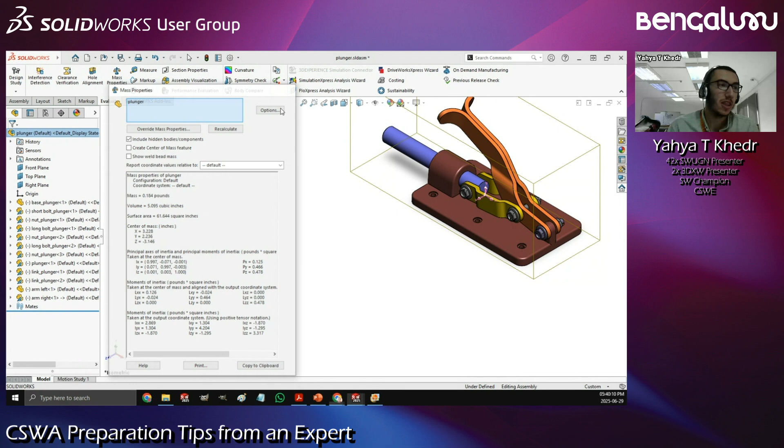The reference is really important. I can say okay, I want this origin to be at this origin, but maybe that's not what the exam wants. Maybe the exam wants this right plane to be with this face, maybe it wants this front plane to be with this face, and maybe it wants the top plane to be with this face. So in that case, what I've got here is the origin—the model looks the same, but the origin is at this point.

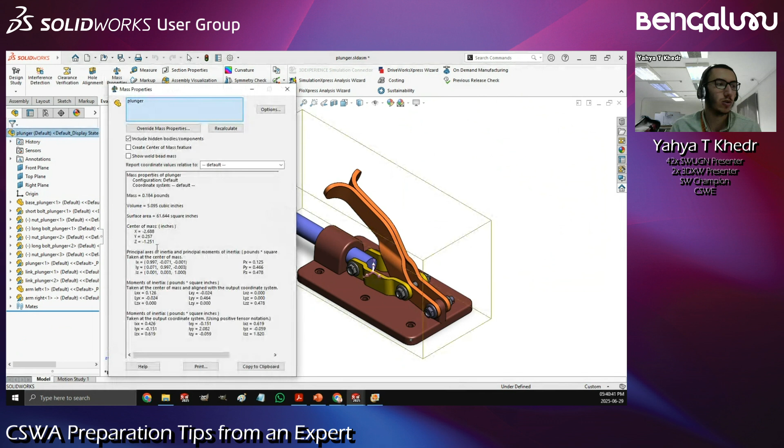And now when I go to the mass properties, a different number. So it's really important to make sure you've got the reference correct, because even though the assembly itself might be correct, all the components mated together, everything in the right position, but you're referencing the wrong origin. This also answers the earlier question about whether it's better to make every part with center as origin—no, the best option is always to follow what the exam asks you to do. If it tells you it's arbitrary, then it's fine; if it doesn't, then you have to follow the question.

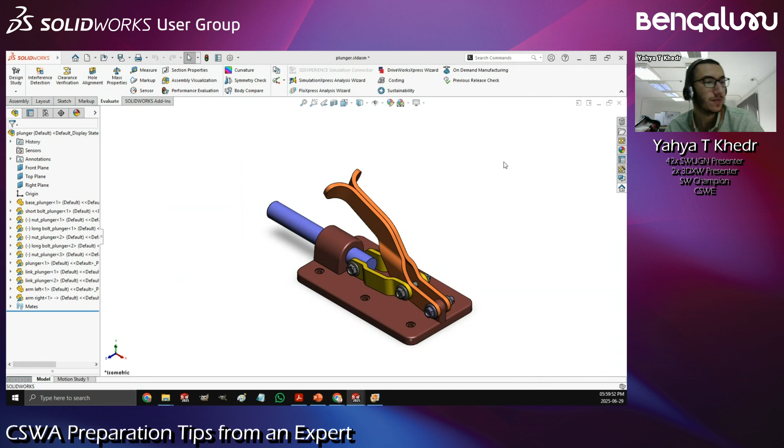Obviously, as I said, solidworks.com/CSWA, that's the beginning. That's where you go to learn about what the exam covers. But that's not enough, so let's see what else. If I jump back here to SolidWorks, and let me just close this file. And also close this file. And while I'm at it, let me also close this file.

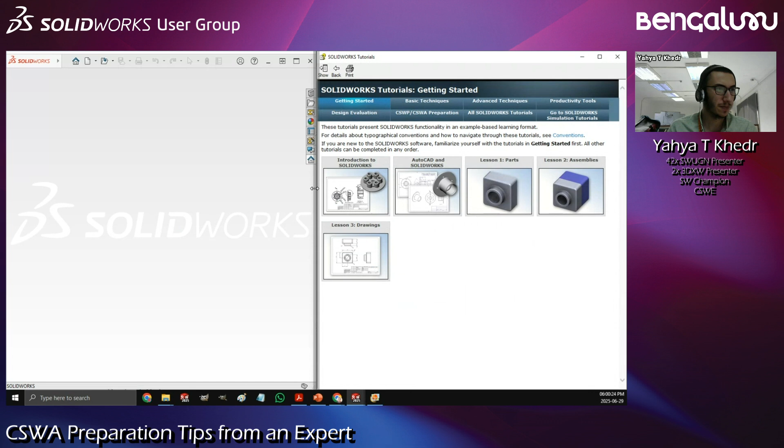Okay, so when you're in SolidWorks, how many of you have went to this help menu in the top right corner, clicked on it, and went to tutorials? I want to know in the chat how many of you know that if you click on tutorials... it's now doing the same weird thing, splitting things across my screen. Let me just fix that real quick.

Yep, just like that. You end up with these built-in free offline tutorials. Not just that - if I go to something like basic techniques, I want to apply on fillets, and it tells me okay, you have to create this part or do this and that and so on. And I don't actually need to do it. I just want to start by applying. I can just click here to open the part, and it's already going to open the part for me to go ahead and start applying the features on. I don't actually have to create it from scratch and waste my time.

And the cool thing is, it says okay, click fillet in the features... fillet, I can't actually find where the fillet is. Well, the cool thing is I can just click on this button and there's the fillet. It highlights it for me. It even goes to the features tab for me. So that's a really cool thing. That integration between these built-in tutorials and SolidWorks is why I always recommend them for anyone.

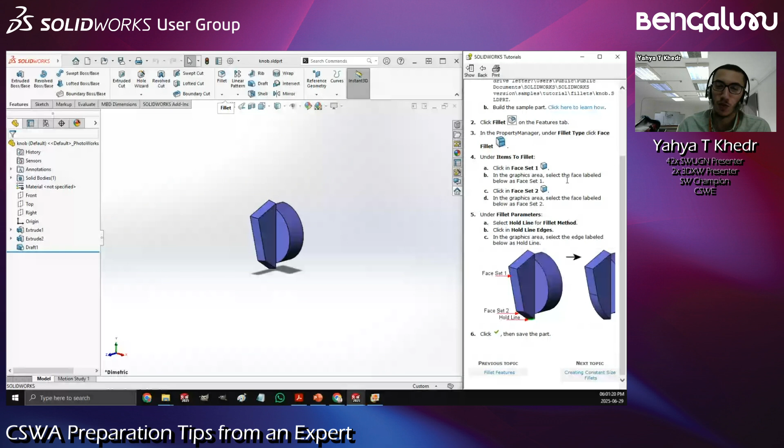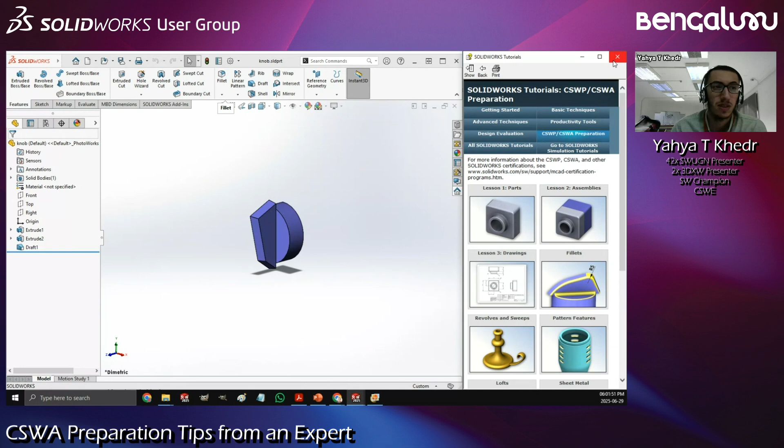And by the way, if you go back to the main area, you can see the CSWP and A preparation. You can just go through all of these, and these are the things that you're going to need to know by preparation before you go to the exam. Actually, some of these might be a bit advanced - you're not actually going to need sheet metal or 3D sketching, multiple parts in CSWA or Simulation Express, but it's good to know them. So yeah, you've got these built-in tutorials, and as I said, they're free offline, and they're always with the software with the example files, so you can just go straight ahead and start applying everything straight away. You don't actually have to recreate anything from scratch.

Okay, now the other resource that I also would like to highlight is My SolidWorks.

Now, how many of you have used My SolidWorks before? I see Christopher here has also used the built-in tutorials, same as me. I started using SolidWorks through those built-in tutorials.

I'd love to hear from Christopher how that ended up with him, because for me it really was the best option. If I'm on the go, if I don't have internet, or if I want to check something on my own pace, I don't want to check a video. I just want to read some text, see some images, and see that integration. I have that always with me with SolidWorks.

But if you want to take it one step further, that's My SolidWorks. I'm also going to put that link in the chat. There's mysolidworks.com, and as it says, it's your place for all things SolidWorks, because it's not just a resource. If you go into this drop-down menu, you can search for CAD models. Why go to GrabCAD or any other website when you can just download some CAD models from here? You've got some training, and you can even search the SolidWorks forum for questions.

If I've got a question, like why do I have this zero thickness error, it's going to search the forum for me. But anyways, what we're really interested in right now is the training, because I can come over here and say, okay, CSWA, hit search.

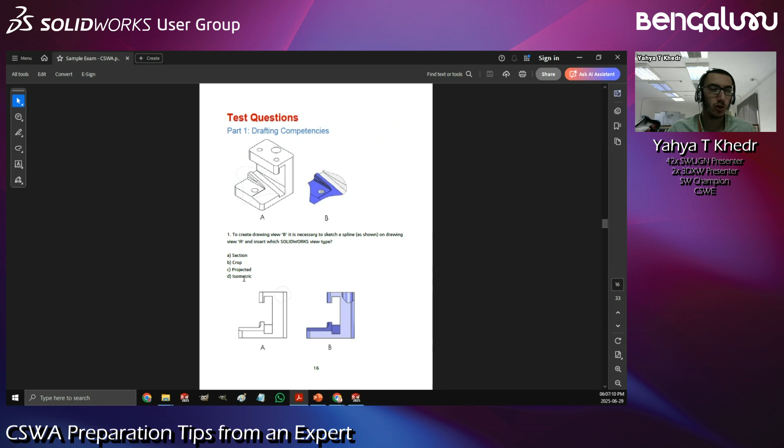Here's the sample exam. You see you've got some questions, some options or choices, and you can write them down. You also have some drawings to create, in the same style you'd have in the real exam.

That's what you see over here. It says okay, this is a question, let's go with part 2 for example. Here are the images, it says build this part inside SolidWorks. Here's the unit system, so make sure to check that out. It also says the decimal places, how many decimal places. The point origin in this case is arbitrary.

So in that case you can put the origin anywhere. It tells you what the material is, and just in case, maybe there's an AISI 1020, maybe 1022, maybe you fat-fingered and entered 1060, maybe you entered the wrong number. It's always good to double check with the density.

When it gives you the density, inside SolidWorks you can also check the density and make sure both are correct. Because maybe it's not that hard here, but when you get something like ABS and find another one called ABS PC, which one is it? You might confuse this with that, but the density is going to be the exact number for only one of those, not both.

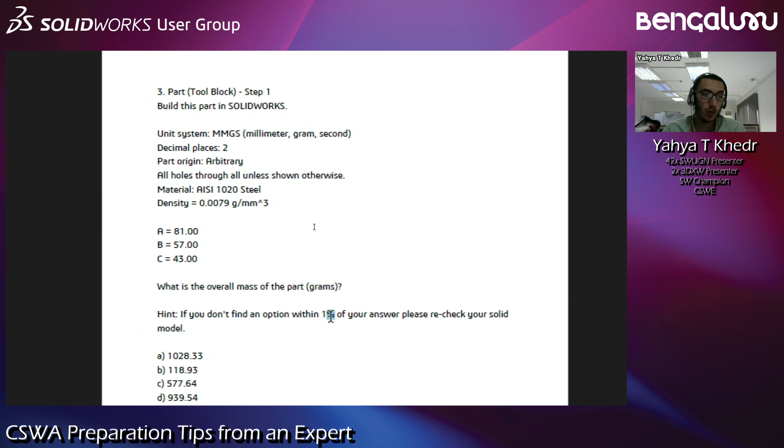Then you're followed by the variables. What I would do in that case is go ahead and create all of these global variables, add them inside SolidWorks, and then here's the question: what is the overall mass of the part in grams? It says if it's not within 1%, then you need to check, and you've got a couple of options to go through. So what I have to do is just create this part and check your option.

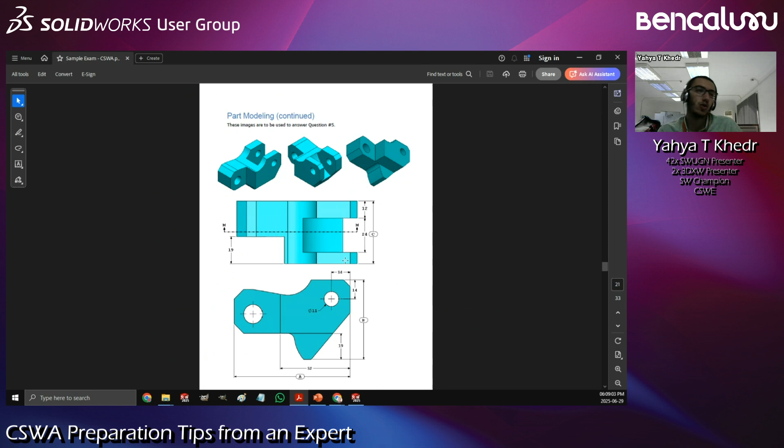The next question says to modify, so maybe you change A, B, and C - they had certain values, now you change them to another value and check. Maybe you start adding different features or removing certain elements and so on. Then it tells you, okay, let's now go to the assembly.

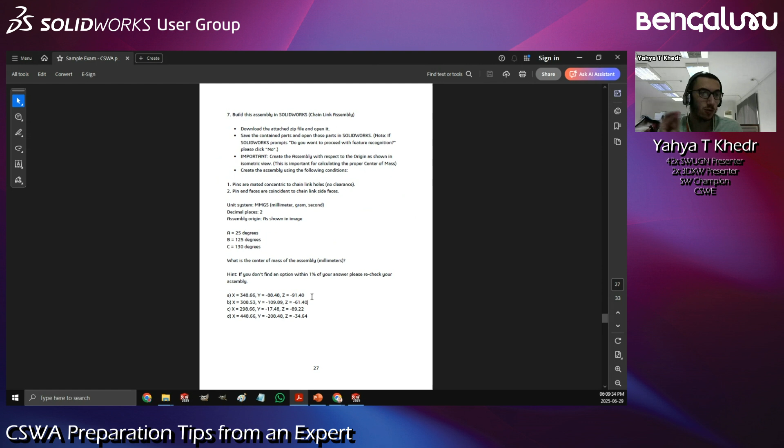Here it says I want the origin to be exactly right here, nowhere else, it has to be over here. This is really important because, as I mentioned, later it asks what's the center of mass, and it wants X, Y, and Z coordinates. These coordinates are relative to the origin that's specified, not an assembly origin you put somewhere else - it has to be exactly where they specified it in the exam.

After you finish all of these, there's the answer key at the very end. It's got all the answers, just to make sure you can double check and confirm everything is correct. And just like that, you'll have finished the sample exam.

Once again, I prefer if you take that exam as part of the virtual tester environment, inside the environment after you log in. That's my personal preference, but either way you still have the same questions and answers. At the very end you've got some hints, tips and tricks, and frequently asked questions.

These are really important because they tell you what happens if I fail, how many days should I wait, what if the computer crashes, stuff like that. So give it a look, it's really useful to check these out as well.